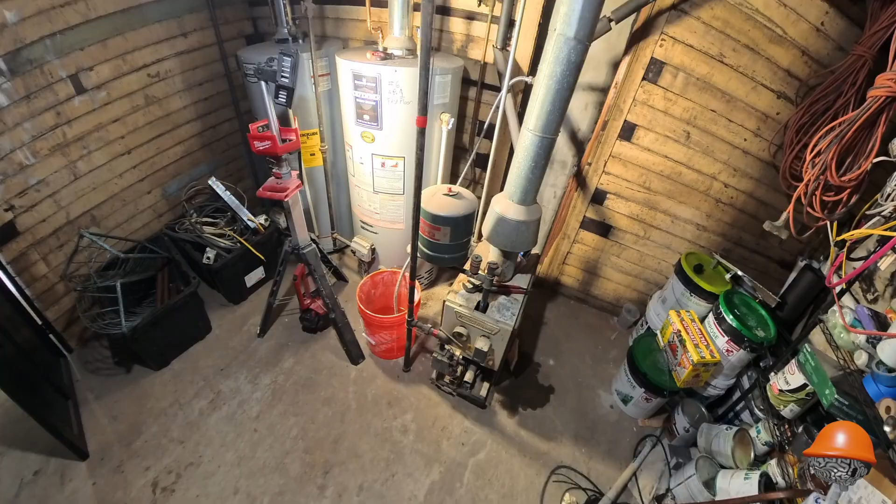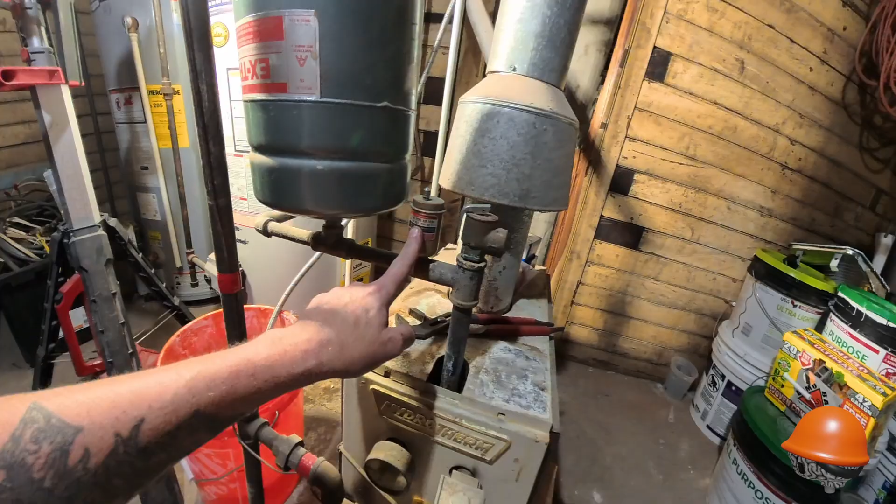So today we're gonna fix things for sure. This is something I did with the 3-bedroom unit that I have over there. Before I rented it to tenants, I went over to the boiler and just visually inspected it. If I saw rust, checked the valves, if anything looked like it was bad, like this, there's rust there. So obviously there's a problem here. This thing was actively leaking on the floor.

So I just unspun the little, there's a copper pipe that sticks out of it. Yeah, it's right here. So I just took that off. I had this system down for 5 months because I was doing work upstairs, and then I went to pressure everything back up, turn the boiler on. Everything works. It just doesn't hold water, which I think is important with these things, pretty sure.

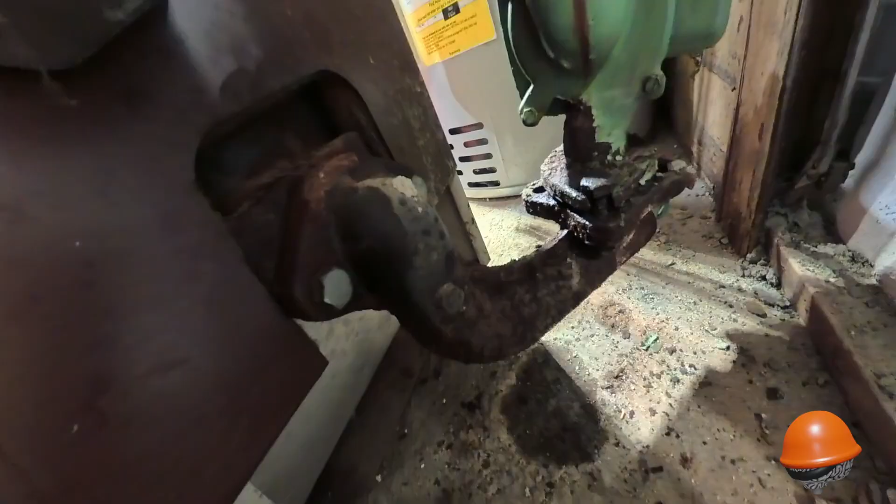And then I came and I was poking around back here. Oh my goodness. Look at that. Oh. Yeah, the pump still works and everything, but yeah, I don't know about that. So I think we're going to do the right thing and spray this with some WD-40 and try to snap these bolts off in the boiler. Yeah, so I think we'll... Oh God, don't tell me, oh, there we go.

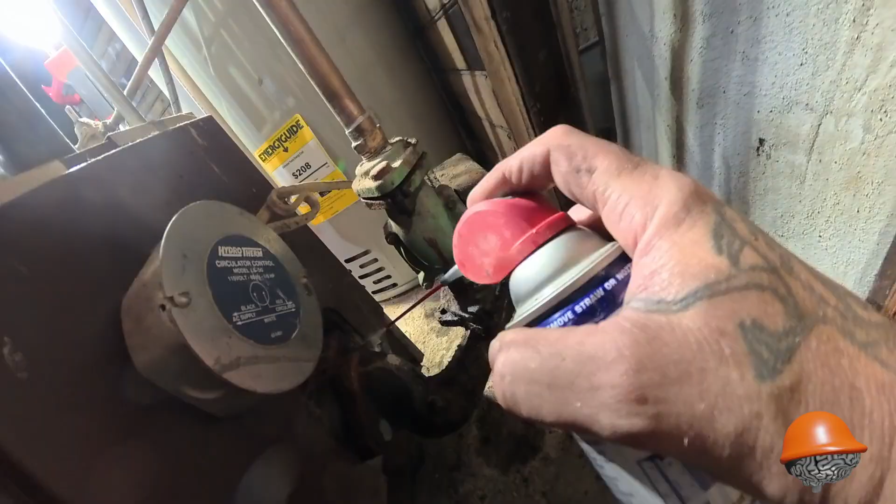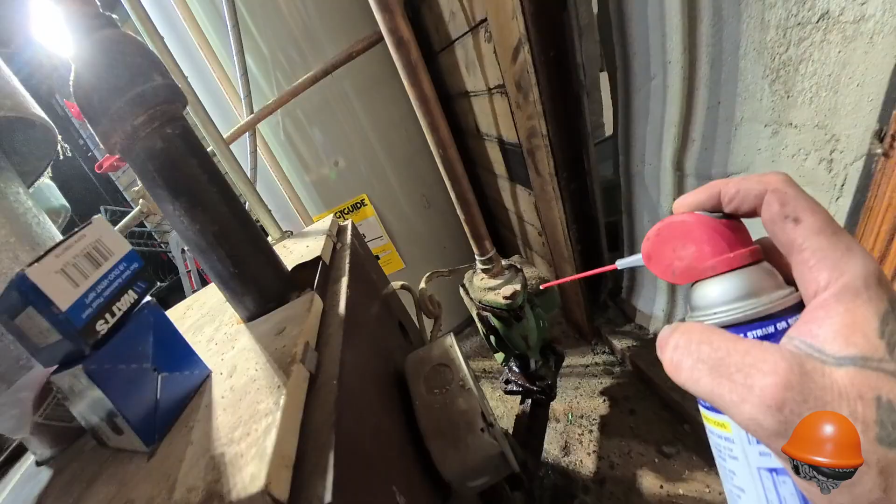Start by giving this a little WD juice. Yeah. That'll smell fantastic once the boiler fires back up.

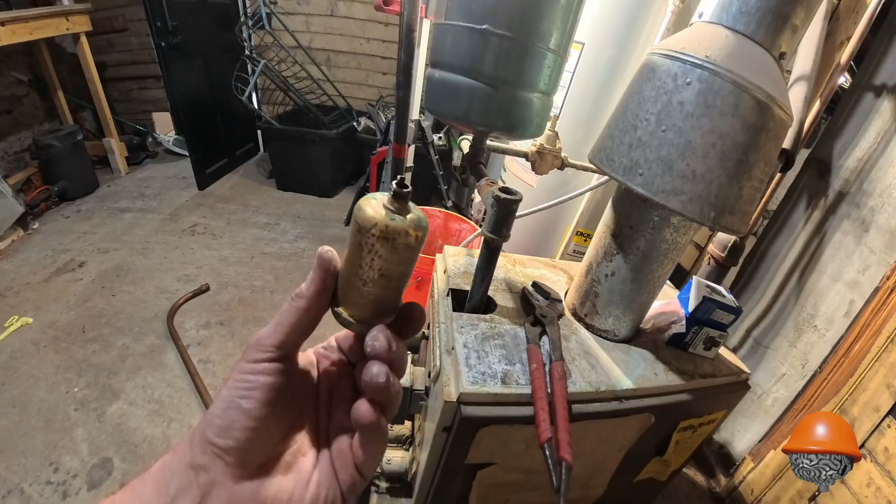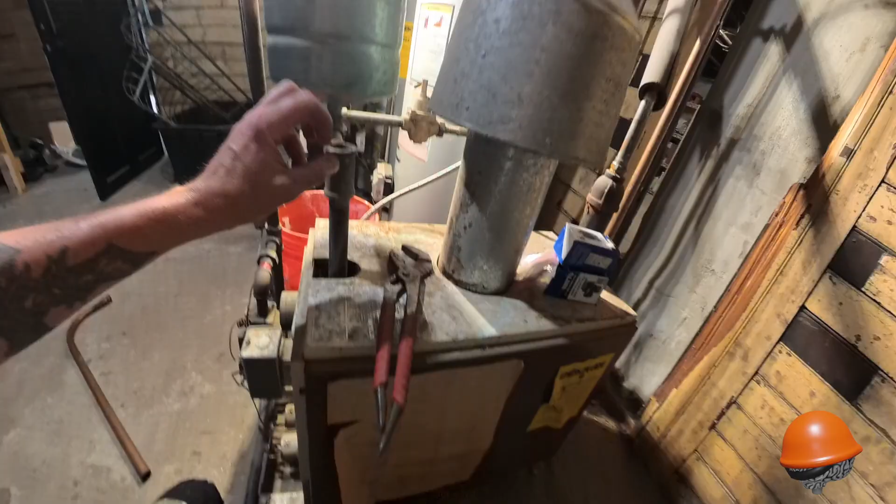So I took out the temperature and pressure relief valve. Opened up that port right there, so all the water from upstairs is letting air in. It's going up through the pipe, and it's letting water down into this bucket. And we're gonna have to just bail that outside. This thing, pretty yucky, man. Yeah, definitely something was happening there. Temperature and pressure relief valve. Yeah, we knew that was doing stuff.

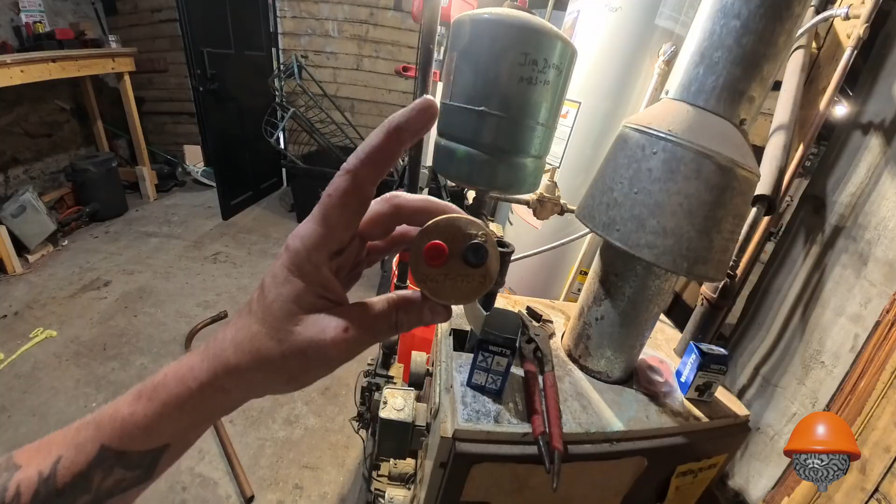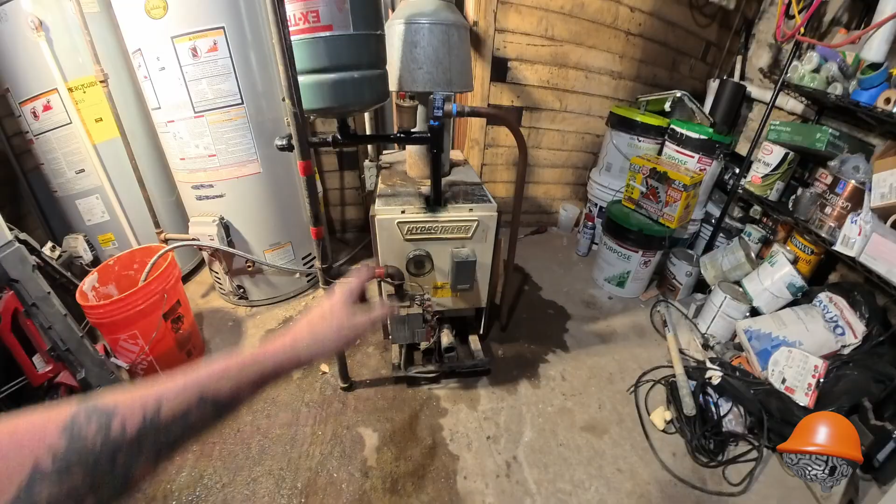It looks better already. We just took some high heat, make it brand new spray, kind of wire brushed it, put in a new air vent, new temperature and pressure valve, our little stick that goes down to within 6 inches of the floor for code. And yeah, it's crazy to me that they use black malleable pipe for water.

But see, here's the thing, right? This water stays in the loop, and you can use that pipe as long as you don't introduce oxygen. So it's the same thing with your boiler. If you fill up your boiler and then drain it out and just let it sit drained out, oxygen gets in there and it will start to deteriorate the inside. So you don't want to do that.

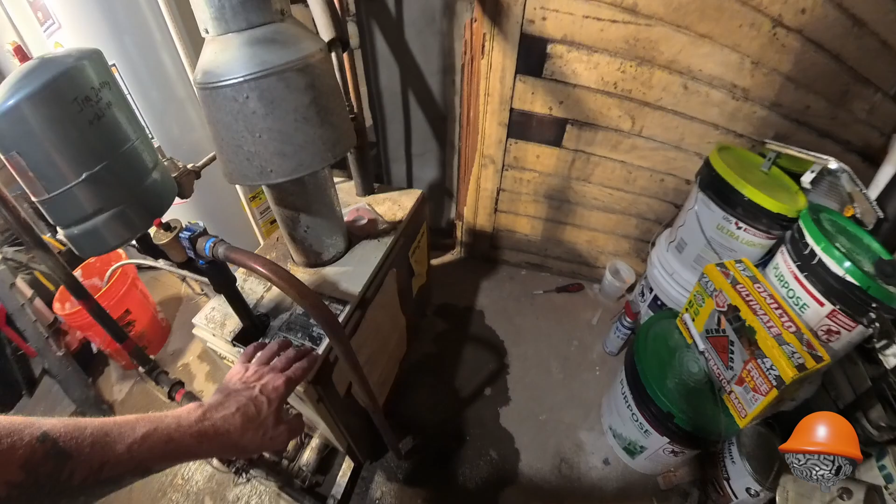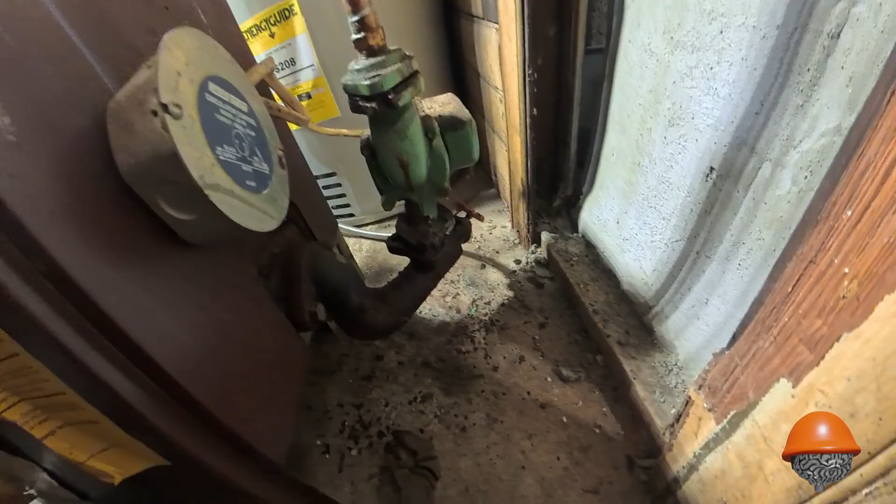I mean, we're probably going to have to do that tonight. We're probably going to have to try to get all the water out of here, pull this apart, and I'll go get some materials tomorrow because I don't know if we have to cut these bolts off. Probably. So this should prove to you, if something doesn't look good on your boiler, I think you should take care of it. Don't just ignore it, because the problem won't go away.

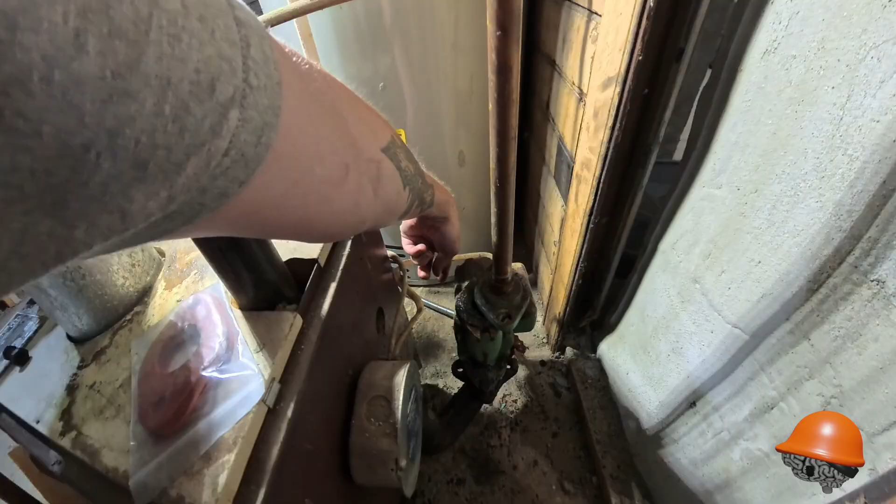So I just went to cut. Yeah, see, I tried to cut this top bolt, but it shook loose before I could get it out. And then this one, I can't get an angle on it. So I went around the backside, and as soon as the Sawzall blade hit the bolt, it just broke. So that bolt was almost completely rusted through. All it took was a small nudge, and it just snapped. So this was like days, weeks away from just going, in the middle of winter.

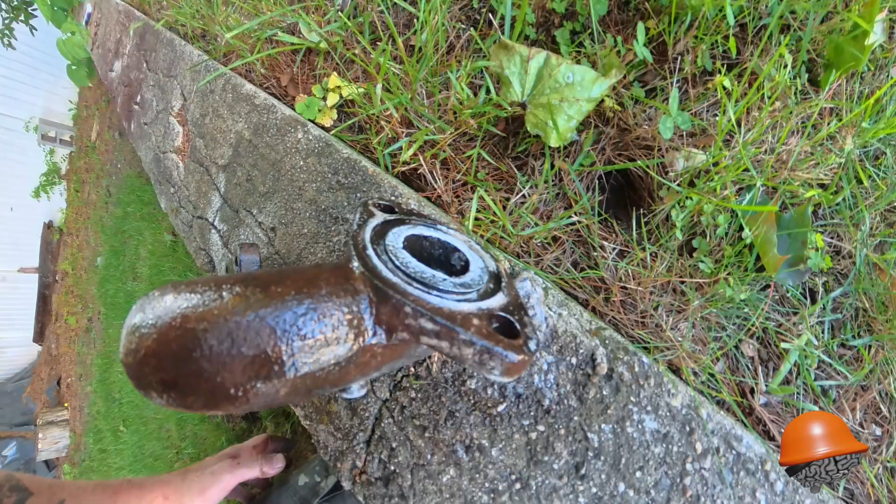Well, leprechauns tell me to burn things, so I burned that. And now we're giving it the rust cutter. Dude, look at that. Look at the rust. It just melts it away. You don't want to get this stuff on your skin, though. It does burn a little bit. Just a little bit. It's not too unbearable, but...

Yeah, this stuff will actually stop the rust in its tracks and makes it perfect for paint. Alright, while we're waiting for the outside thing to kind of dry...

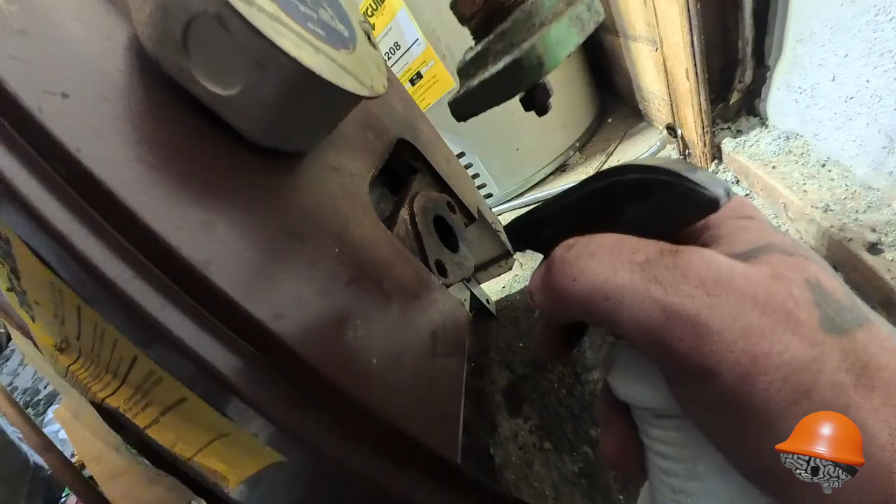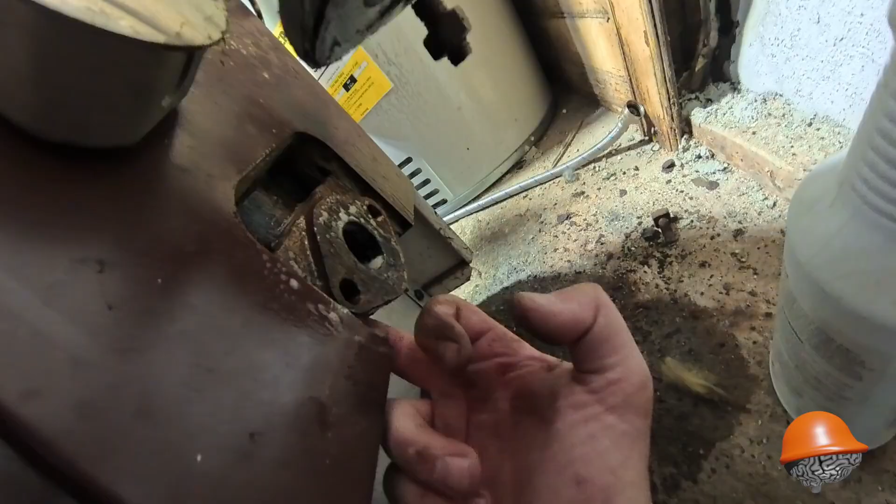I wire brushed the crap out of this after I put some rust cutter on. I made sure to get in the holes, and you can actually get in behind these holes. That's where the nuts... oh God, this stuff. Some powerful stuff.

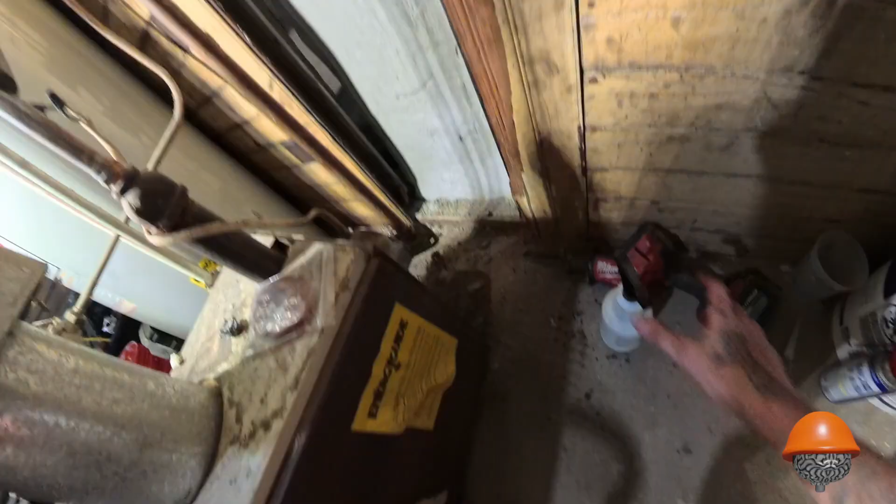But I just want to hose... oh God. Yeah, this stuff works amazing, but it burns your skin a little bit, and you don't want to breathe it in.

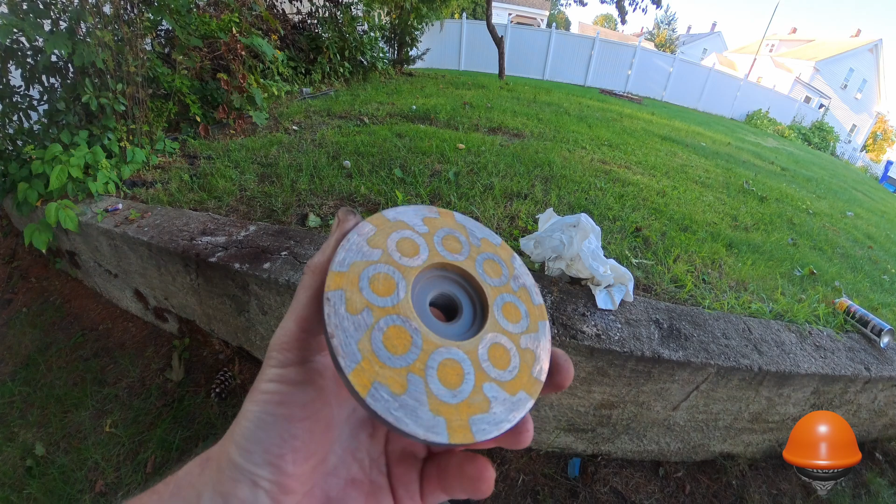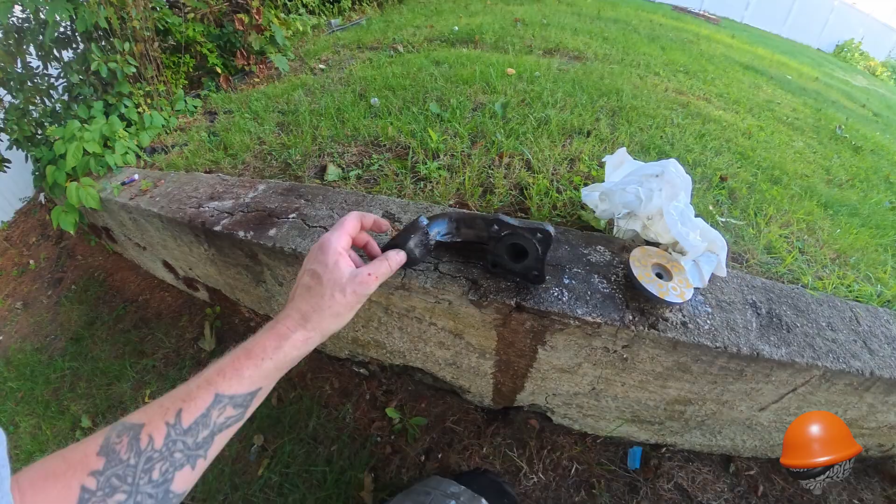So I have this. It's for grinding countertops. It's a diamond bit. It's super flat. It was really expensive. I bought it for a different purpose, but it didn't exactly work for what I wanted it for, so I've just had it. And I'm thinking this is the perfect candidate to kind of just flatten that flange.

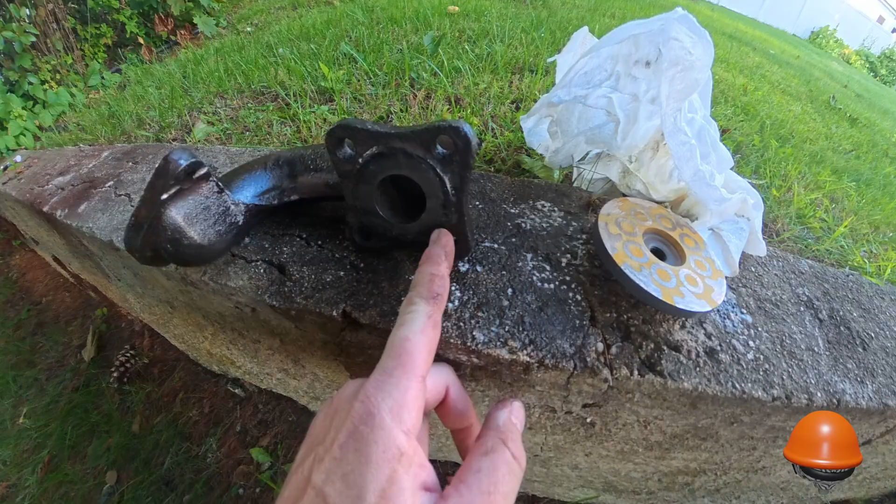And see, this is the thing, right? This side has that opening, so the black gasket sits down inside of that. I'm thinking they used black gaskets the last time, which don't go all the way to the edge. That's why we have this crusty outer layer. It's because the black gasket actually makes a seal on the inner side of this. So I think the best bet is to go with the black gaskets and not the red ones.

But I'm still going to very carefully get some of these high points flat, dry this off, maybe heat it up so that it dries quicker, and then we're gonna give it a paint job. Oh my God, I didn't think that was ever gonna look new with the rust buildup. It flowers, it grows like weeds, and you gotta knock them off. I think once that dries, that's going to look pretty dang good.

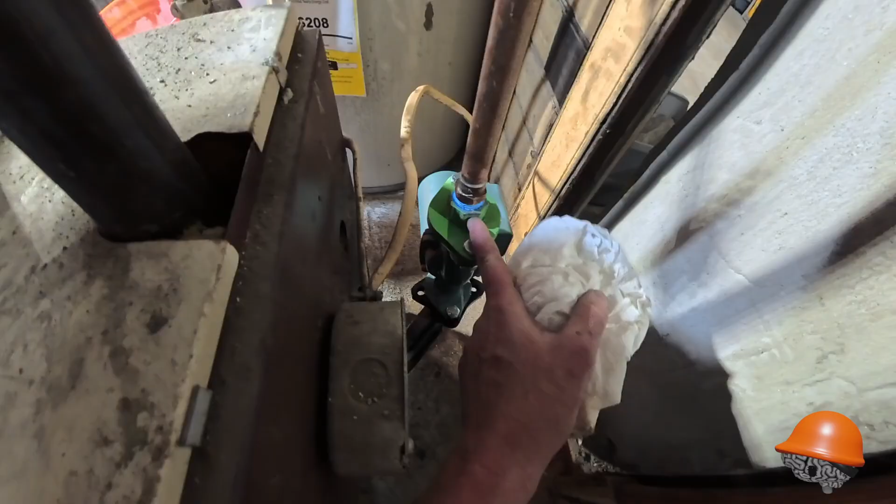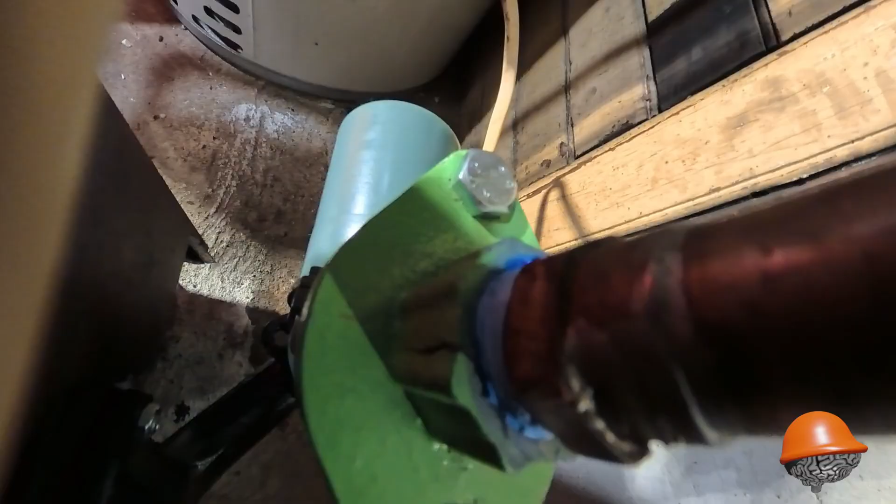Alright, well, I was tightening this flange on, and it was hard. And then all of a sudden it got really, really easy. And I should have known what that means. Can you see it? Yeah, it's split. Taco flange, split.

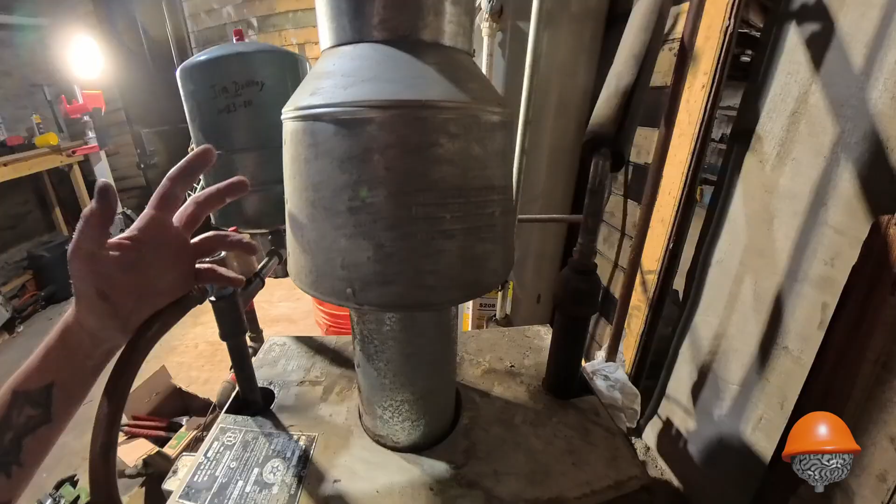So at least we have some water in the boiler now. We're holding water up to here. I'm going to go grab another Taco flange and a new expansion tank. And then hopefully this thing will work and nothing else blows up.

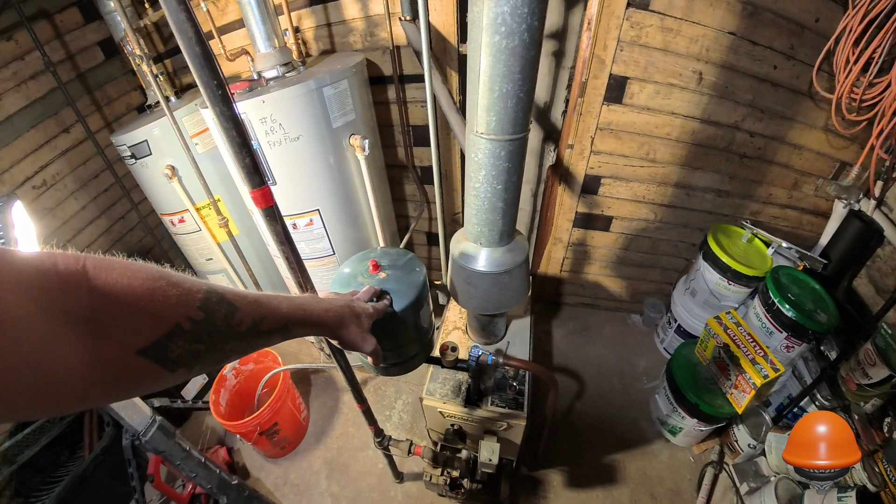All right, so we're gonna start off. I did go to Depot and saw that they had expansion tanks. They were like $30 each, and I was like, yeah, we should grab it. But then I saw the quality of it and I was like, nope. So I wanted to see what this was, seeing that it's been here since 1980.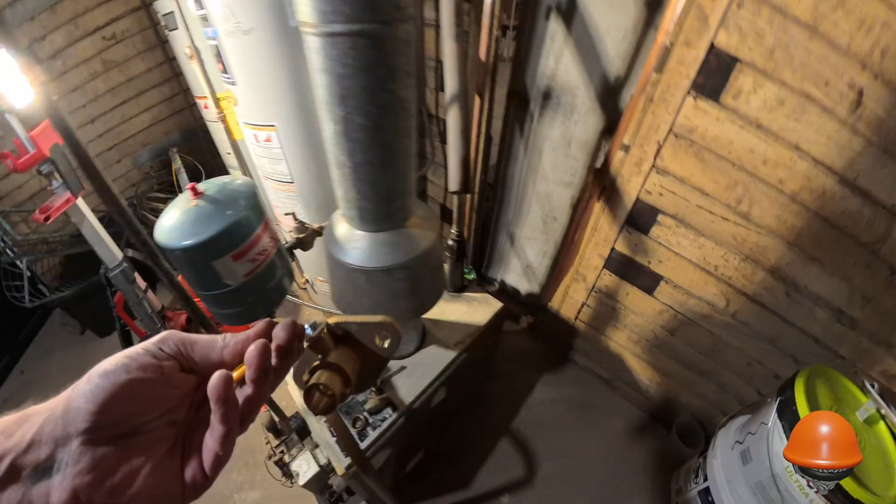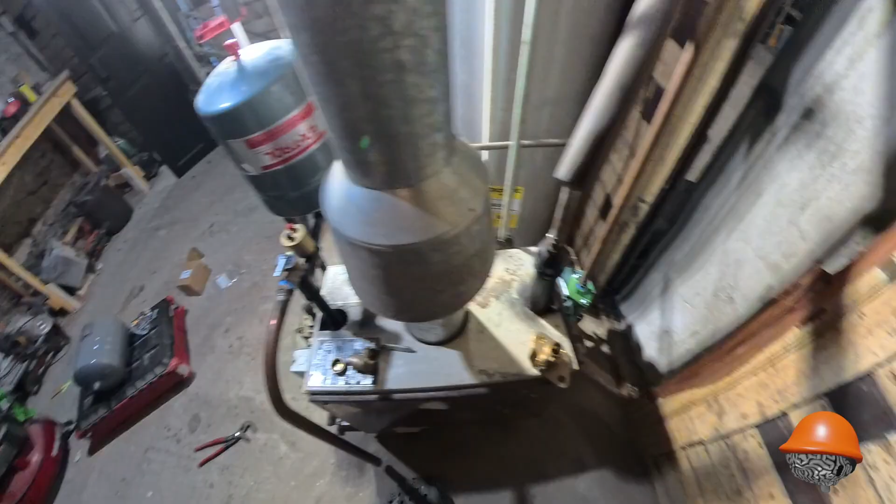This is an Amtrol Model 15. So I looked online and son of a gun, there's the Amtrol Model 15. It was $60, twice the price of the Home Depot one, but I think that was a wise decision. Let's pop that in. And then, look at this. No more threads. No more stuff to snap and crack on me. That's getting soldered on, and it's solid bronze. All right, let's get rid of this.

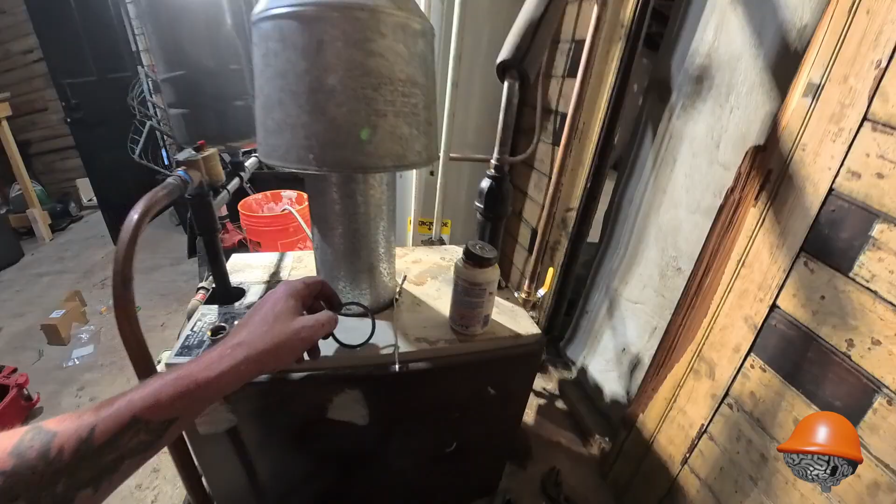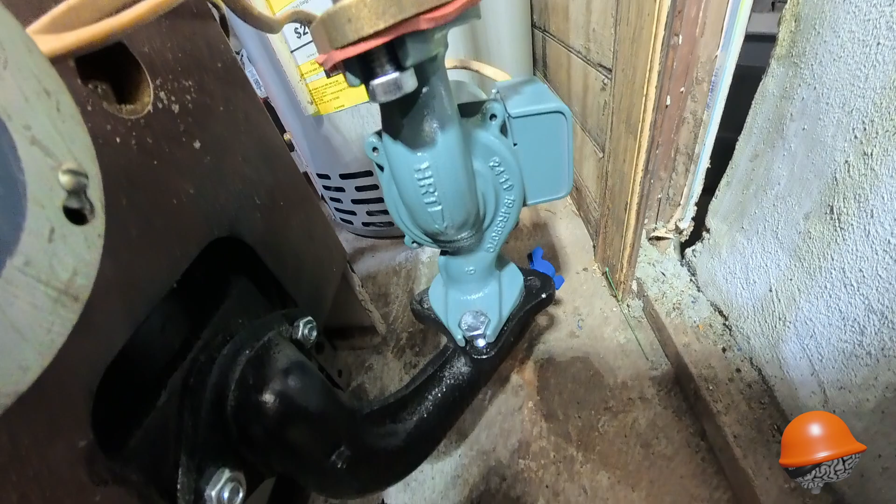All right, I got it cleaned, fluxed. I dropped the bolts in loosely to make sure we're lined up correctly. Put the handle in the back where you can get to it. There's no gasket in there. I'm gonna solder it up now, let it cool down, and then slip the gasket in and tighten it up. Yeah, look at that. That looks brand spanking new.

All right, guys, this is why you should always trust who you're hiring. No matter if it's mechanic work, boiler work, housework, always trust who you're hiring. Because I find it's a common theme that people just tell you, sorry, you need to replace it. And they take advantage of people, and it's sickening to me.

So I had a heating company tell me I needed a new boiler. It's unsavable, you need a new boiler. Then I went to a couple of supply houses to find parts, and they also told me I need a new boiler. And I was kind of sick to my stomach. I'm like, you guys are fucking scumbags. You know what I mean?

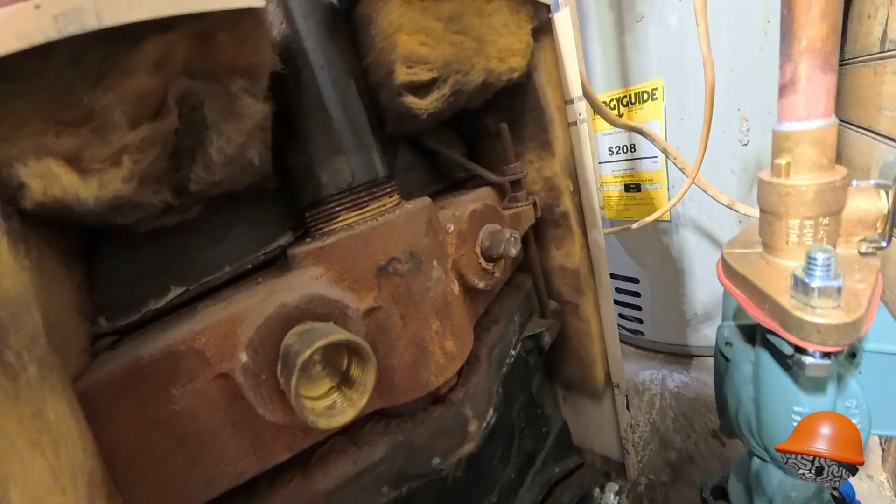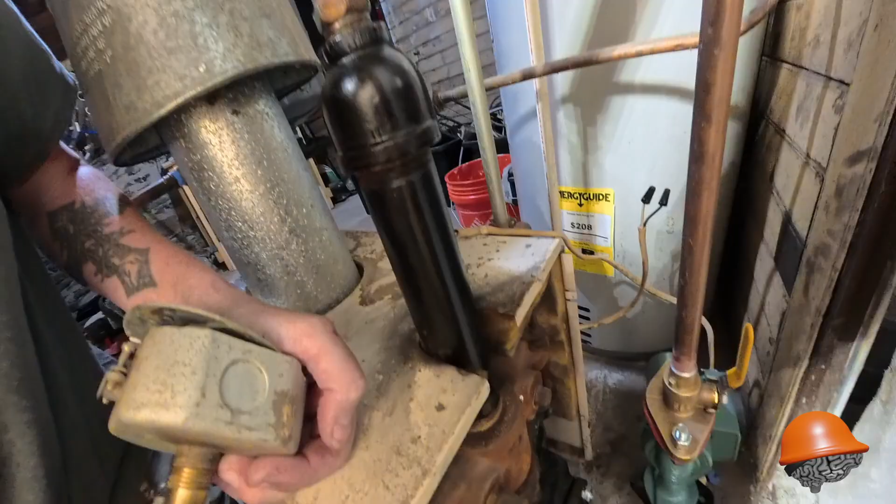Because I took the jacket off my boiler. The actual boiler itself is in excellent condition. I mean, there's no rust. I mean, this thing looks beautiful. All right, the jacket looks a little rough, but the jacket is just to cover in a little bit of insulation to cover the boiler.

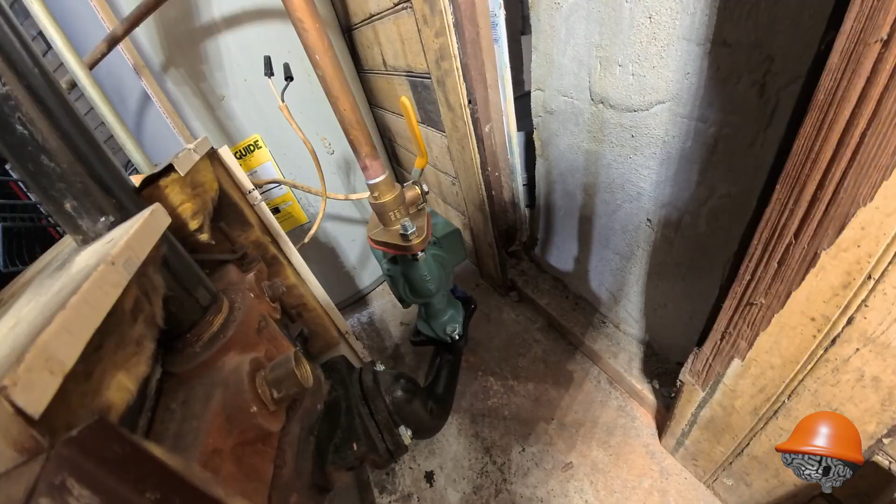So I got everything running. We're full of water, and it works. If I turn on the thermostat, the system fires up, and it runs, and it heats. The problem I ran into is this new Taco pump that we put in. It does not shut off. It just keeps running and running and running.

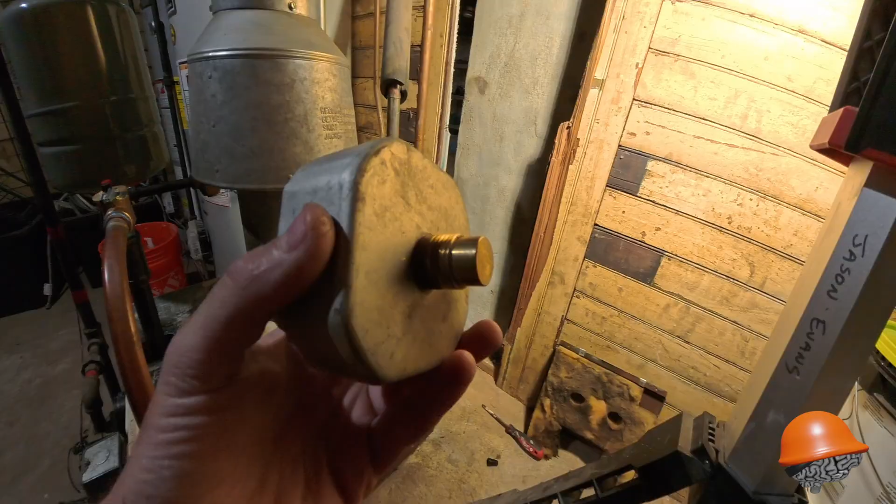So I did a little digging, and I found this. You see that little brass thing? That threaded in there. And then there's some wires coming out of it. But this is full of water, and I've already bled everything out, I don't want to take those out, necessarily.

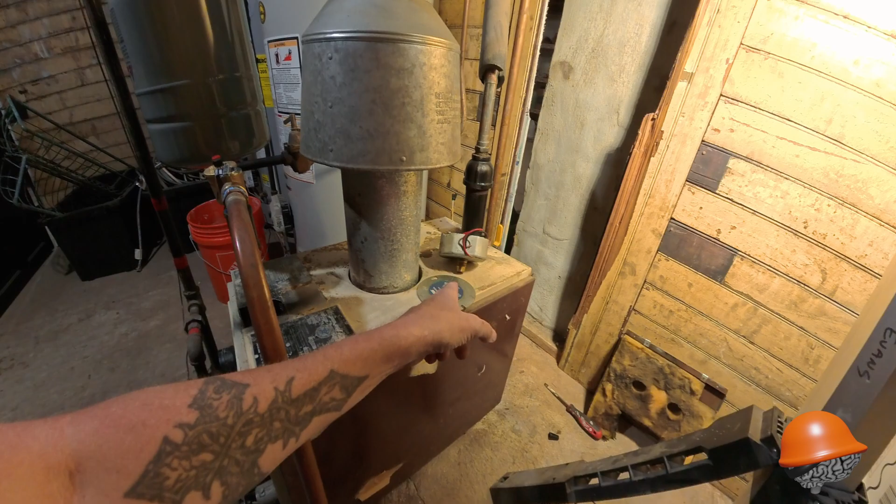And what does this say? Oh, this is a Hydrotherm circulator control. So this is an electrical control. Model LS50. Problem is, this part doesn't exist. They stopped making this part a long time ago. Right, so I went looking for this or a substitute.

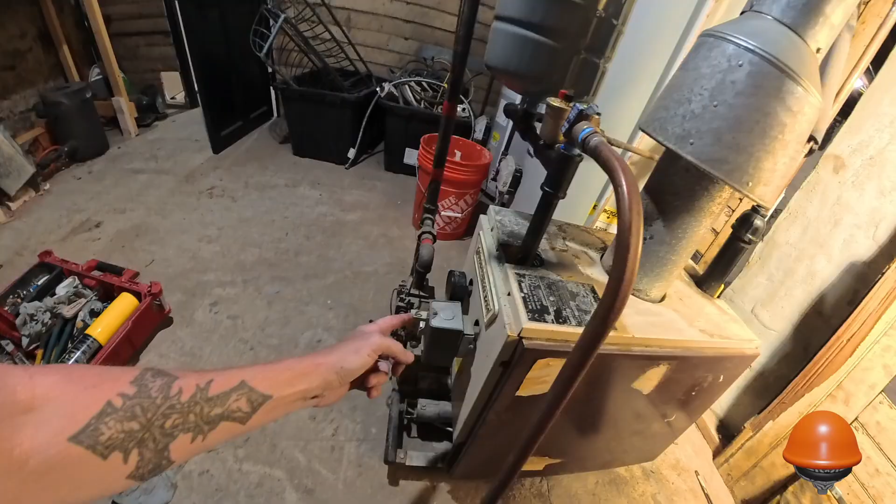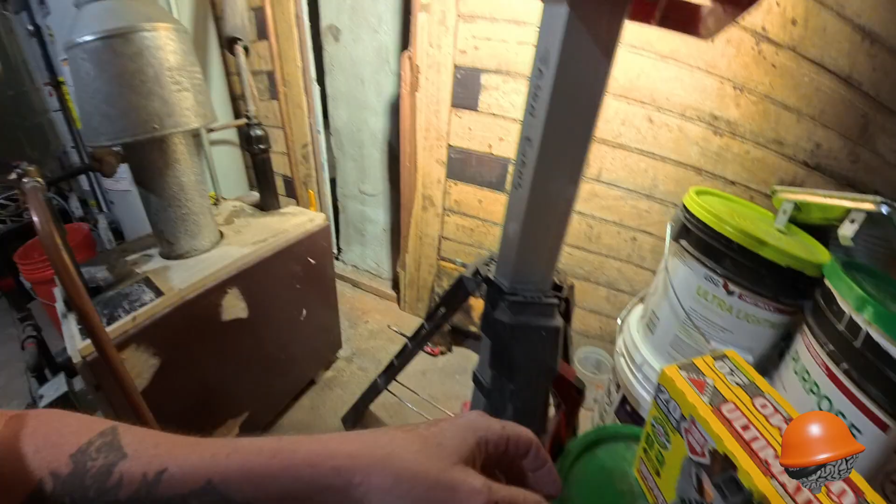I even asked AI. AI told me to get one of these, a Honeywell. Basically, this sort of does the same thing as this. This uses a little probe, and it senses the temperature of the boiler. Once the temperature is hot enough, this will make a connection and send power to the pump. But when it cools down, it's supposed to shut off, but it doesn't. So that switch is broken.

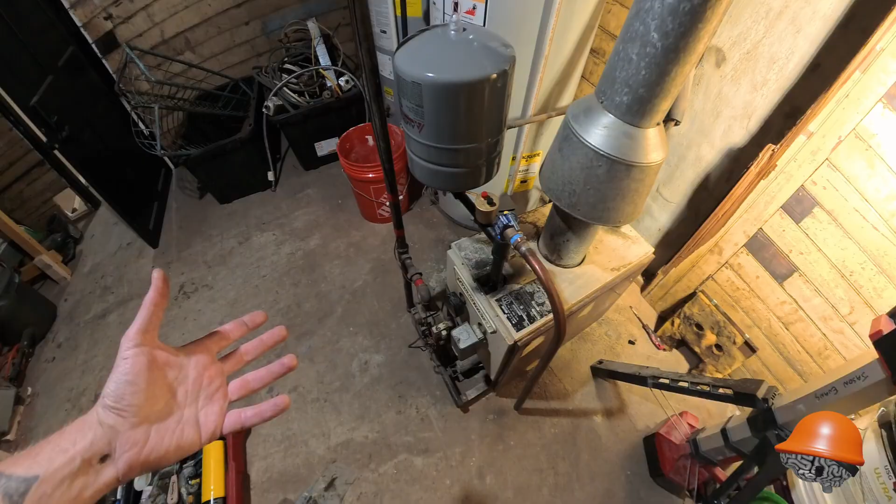So they're telling me I need a new boiler because of an electrical problem. Does that make any sense to you? No. And basically, I did not like the idea of these because I don't know if it's normally open, normally closed. I'm not sure.

This basically senses the temperature of the boiler. Once the boiler gets up to like 180 degrees, this will tell the gas valve to shut down. And the circulator pump will continue to circulate the water as it cools down. If it gets cool enough and you still want heat, this will tell this, hey, fire back up, and it will kick back on. It's pretty simple.

Right? But the whole thing in the back, and I figured the best way to show you guys, I mean, these old systems, they're so simple, it's crazy. But sometimes that's what you have to do. You have to take a step back and boil things down literally to the simplest form. So here we go. Here's the setup we have currently. I drew a nice little diagram here.

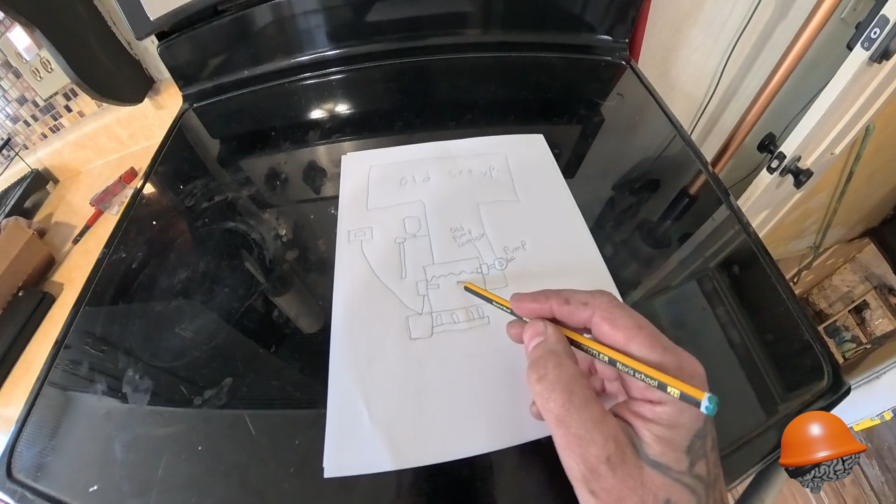So what is a boiler? It is a cast iron case or container that has water in it. And then we have a gas valve right here. And this heat tube, the flames come up and hit the bottom of the boiler, heating up the water. And when you're in your house and you go, hey, I'm cold, I'd like some heat, you turn on your thermostat, and the thermostat sends a signal down here to the gas valve.

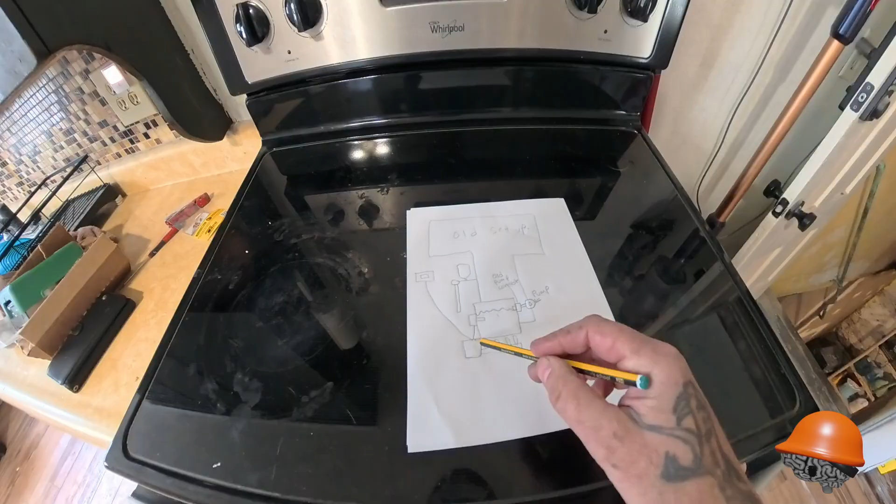And I'm leaving parts out. Yes, there's a thermopile here that's on the pilot that takes heat, converts it to low voltage electricity that goes up this wire. And then when you call for heat, it makes a connection and then it comes back. Yeah, I'm leaving out some stuff. I'm just trying to get the very, very basics here.

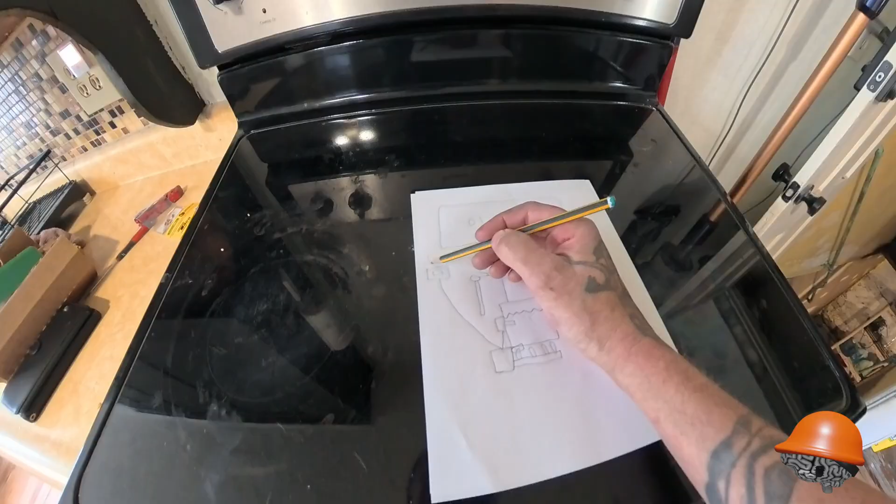So we have the aquastat here in the front, senses the temperature of the water and tells the gas valve to turn on and off accordingly. And if you say, I don't want heat anymore, then it just all shuts down. But if you still want heat and the water gets too hot, the aquastat in the front regulates and tells the flame when to come on and off. Pretty simple, right?

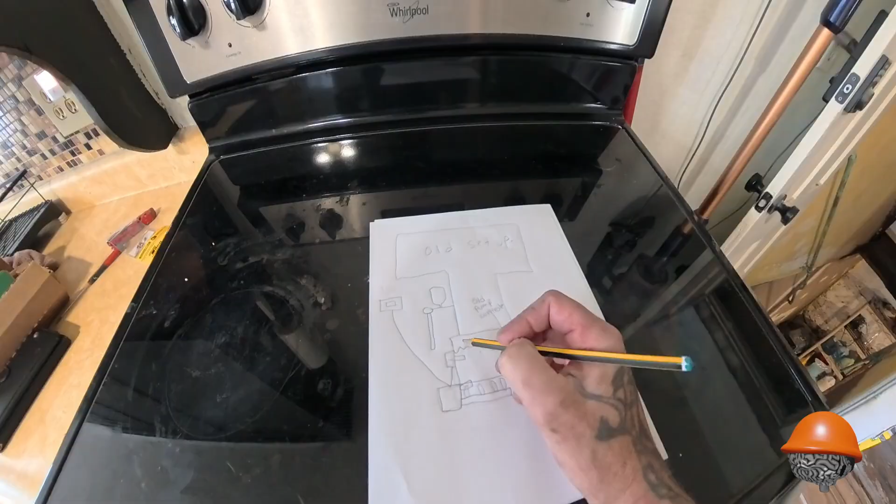Then we have a pipe coming out of the top. That water gets pushed. And we have an expansion tank because when this water heats up, it expands and it needs somewhere to go. So it goes into this expansion tank, which has a diaphragm. There's water on the bottom, air on the top. And then a safety valve, temperature and pressure relief valve.

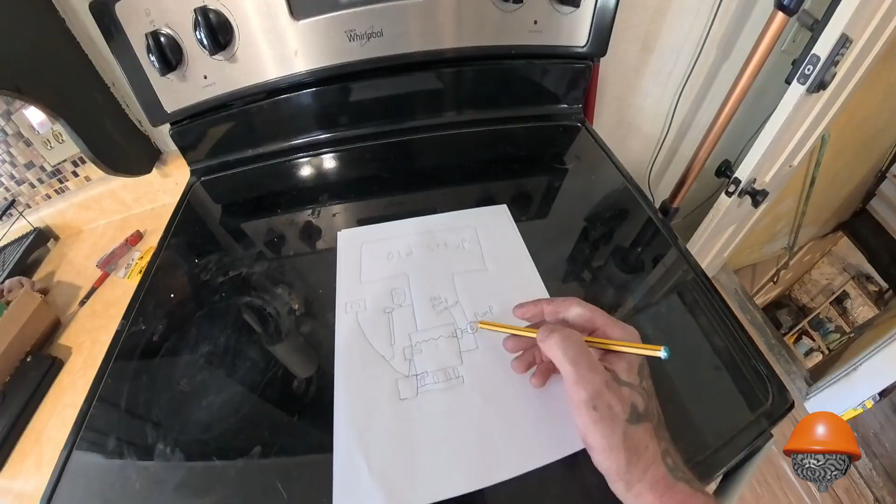If this tank failed and it was full of water and the pressure was building up beyond its limits, it would shoot the water onto the floor so it didn't explode. Got that? All right. Now the water gets pushed through your whole house and then comes back down, and this circulator pump pulls that water down and pushes it back into the boiler and then back up,

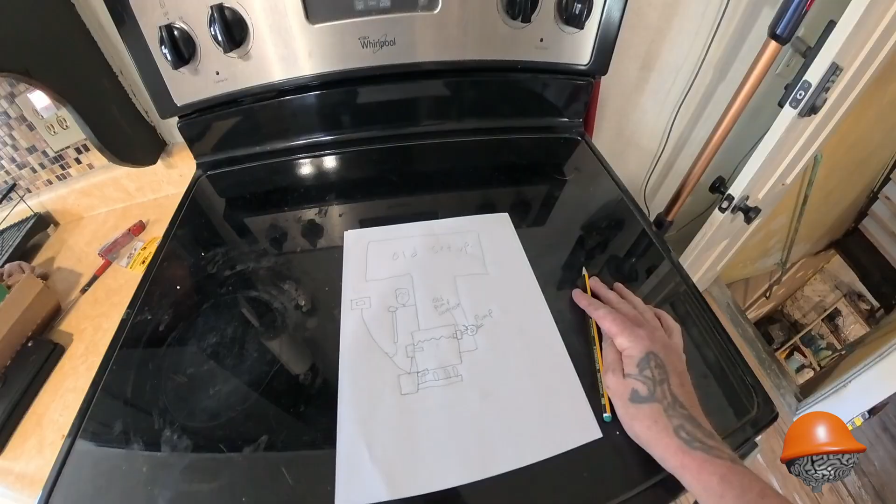and it's just a continuous loop. And the way the old system worked is we had a control module here on the back that sensed the temperature of the water and told the pump to turn on. You got it? I mean, it's pretty simple. And yet, every person I was talking to told me that I needed a new boiler.

Right. I had 4 guys at a supply house, baffled. They were just sitting there like, we don't know what to tell you. I'm like, come on, guys, you don't have a boiler expert? There's got to be somebody here that knows some sort of control. I said, all I'm trying to do is control the Taco pump. I need something that will tell it when to turn on and when to turn off.

I mean, come on. They couldn't, I was like, forget it. I'm just going to go look in your aisles. So I started walking through their aisles back and forth, opening boxes, and guess what I found? Made by the same company that makes the Taco pump. This is a switching relay for one zone. That's what we have, one zone.

And basically, I asked AI, and I looked on the online forums, and what the online forums were telling me to do was to put another one of these aquastats in the back, and then have the aquastat control the pump, which may or may not have worked, depending on if it was normally open. There's switches that are normally closed and normally open. And then depending on the control, it'll either close it or open it. That's very important to know, and they couldn't tell me.

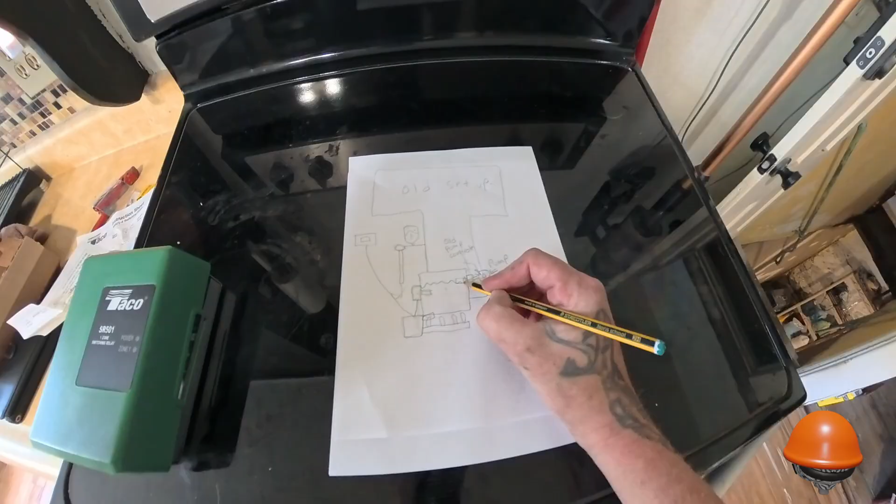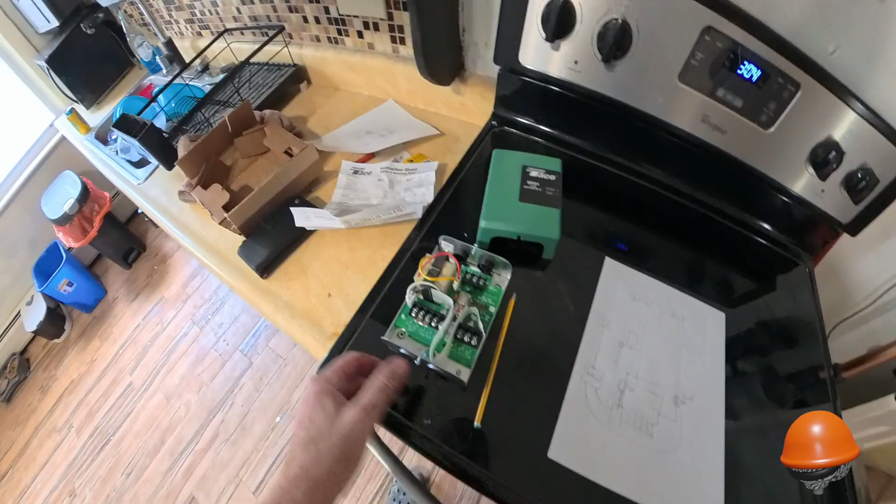And plus, to get the new brass probe to go into the boiler, plus the control, it was going to be $200. $200 for those two controls that I had no idea if they were actually going to work. But then we found this. So this is how, in theory, I'm thinking. I'm still going to have to figure out controls a little bit, or wiring, which is basically just plumbing in wire form. But this is how it should work now.

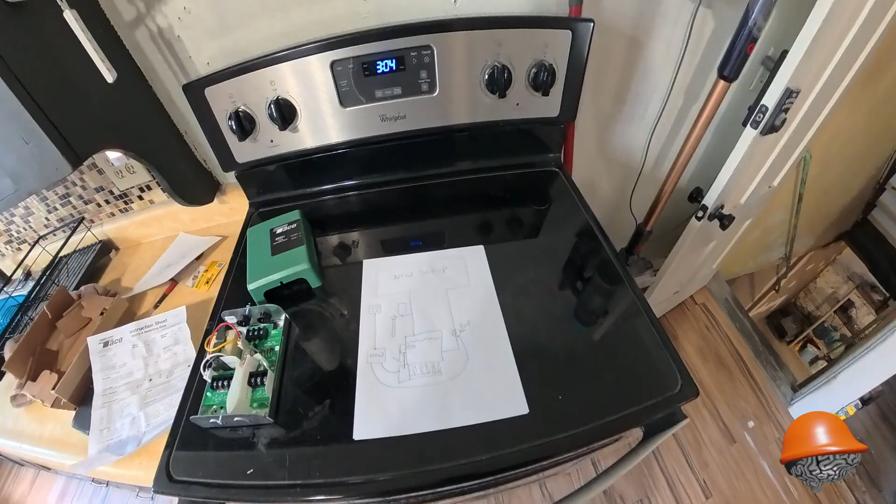Here's our new setup. So instead of the thermostat coming directly down to the gas valve, the thermostat's going to go into our new controller box. And then from the controller box, it will go out to the gas valve. So this control box will control not only the boiler turning on and off, but it will also control the pump. So this will be the main control module now.

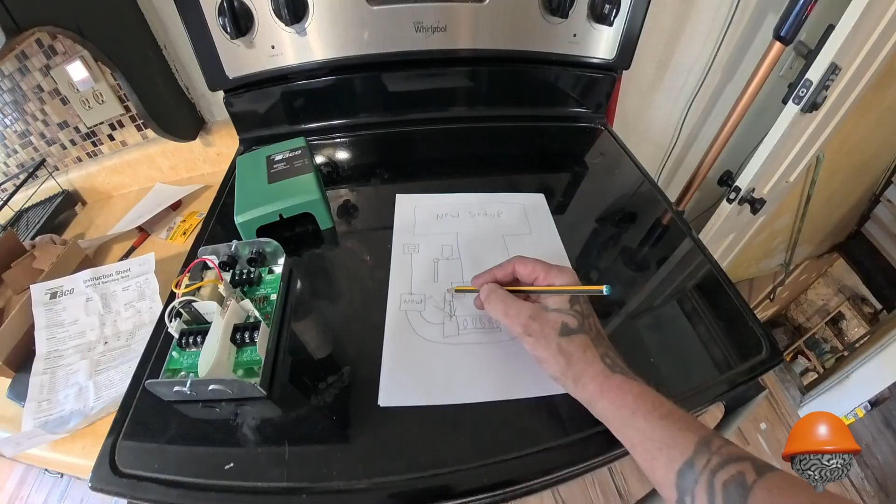That should control everything. We do not need to disturb the link between the aquastat and the gas valve. The link between those two can be left as is. That link does not need to be controlled by that box. All we have to do is just take the thermostat wire off the gas valve, put it into this, and then bring power in, bring power out to the pump. And this was $80.

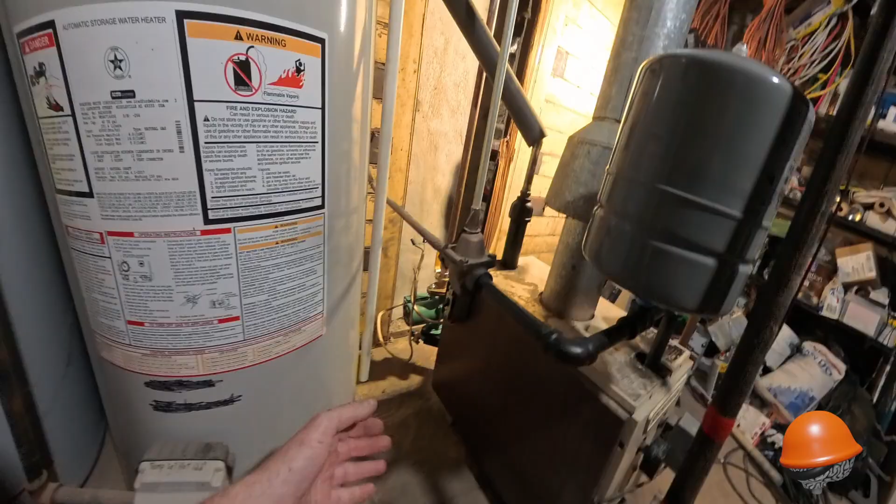All right, so while we're here, I want to double check the electrics. All of them. Because usually when you see a switch on the side of a boiler like this, that means you can turn everything off for service, correct? Say we were going to change that part in the back, we want to be able to turn the power off so that we can service this and not disturb anything else. I went and flipped this off, pulled this wire out of the old control, and sparks flew.

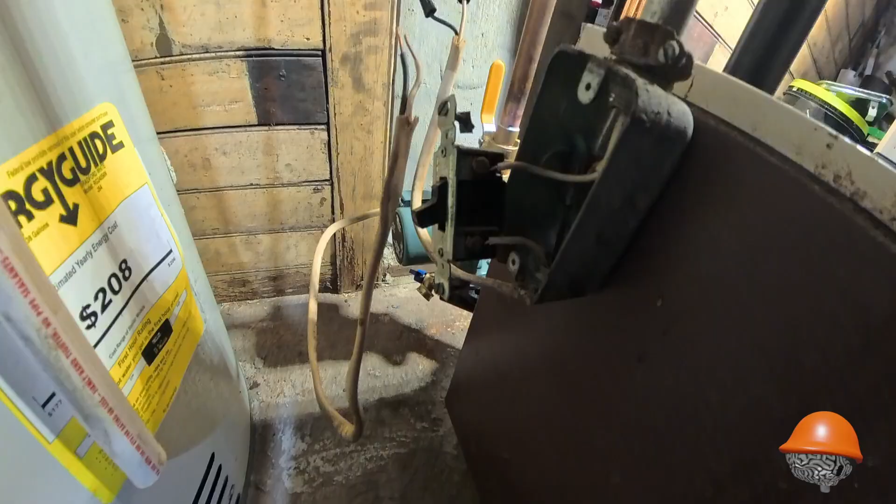Well, I would say this is unbelievable, but I have found worse things in this house. They put the common wire to the switch, not the hot wire. I mean, God forbid. So that would make perfect sense why when I tried to pull that out of the box, sparks were flying.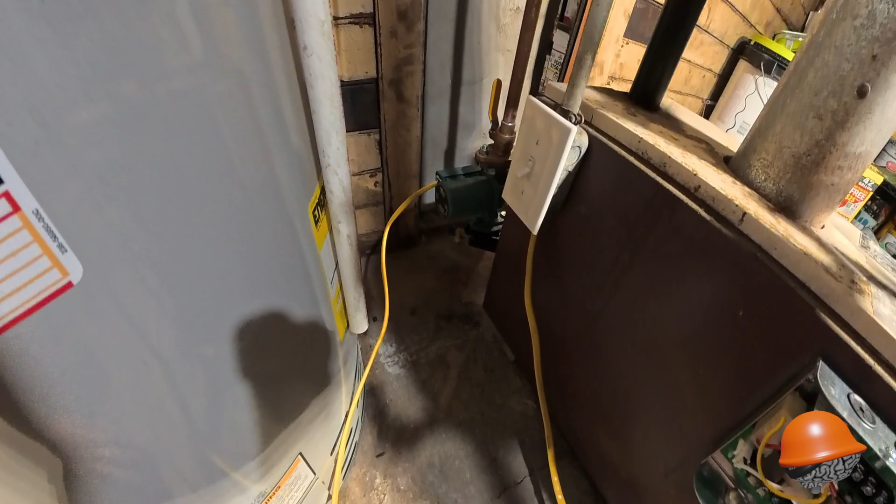So we're going to replace this switch because it feels old and clunky. We're also going to replace this with a longer piece of wire, and we're going to hook the new switch up properly. All right, so we got our switch in correctly this time. I had to shut the circuit off. It goes to that light because this is where that's pulled from.

New switch. I put a plastic plate. I mean, it's all I had. Maybe I'll get a metal one at some point. And then I put a new wire coming from the electrical box. So now when this switch is off, everything's dead. Everything. Including the wire coming out of the box, like it should be.

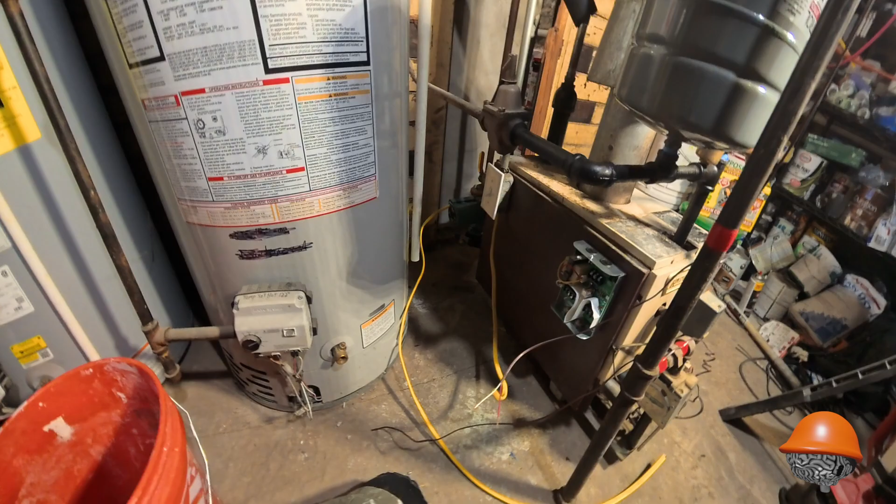And then I put a new wire coming from our Taco pump, because it was too short. And here's our thermostat wire coming down from upstairs, which is brand new. Just ran this. And we mounted our box to the side of the boiler here. Couple of screws through the jacket. Won't affect the boiler at all.

And then I've added a new thermostat wire with a little coil just for some extra slack, you never know. Reconnected to the gas valve, taped on. And this will come in the bottom. And then these two wires will go into there.

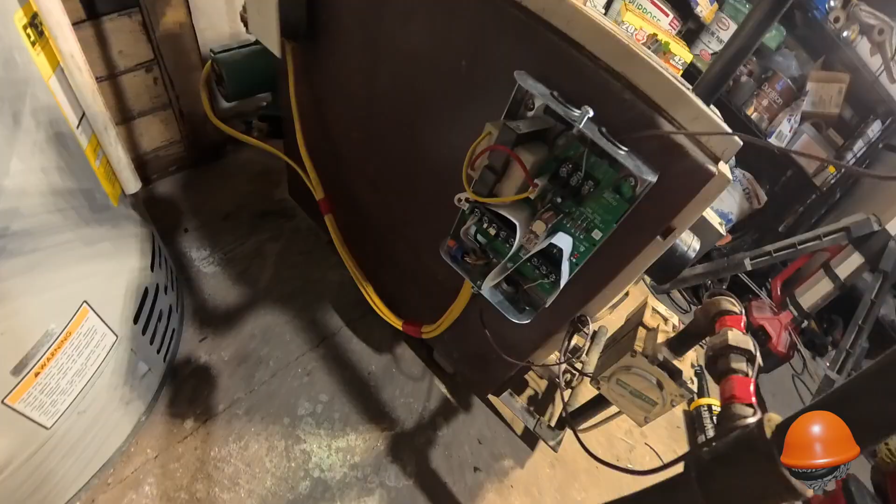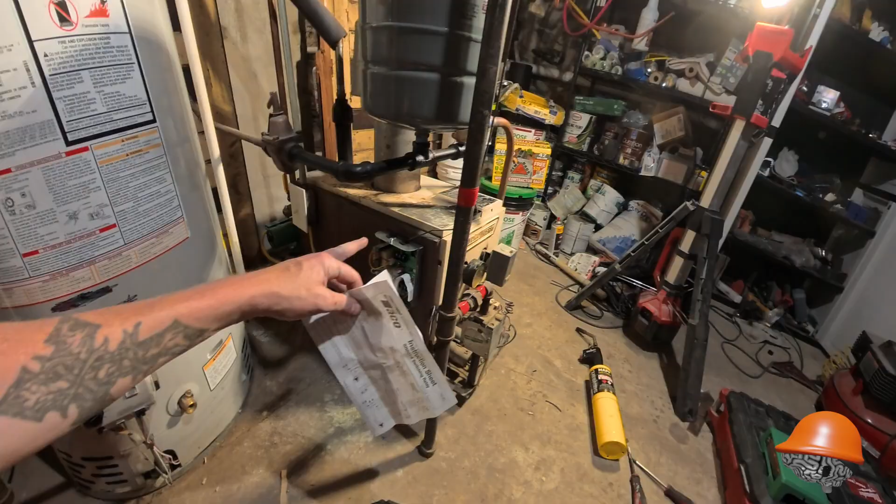Alright, so this is just for anybody who's interested or may have the same problem I had with a Hydrotherm boiler. It's so old you can't get parts for it. So I got a Taco one zone control box, and I went with typical wiring, the very first one. Then there's alternative wiring, and there's a bunch more on the back. But just to go over this before we test it and see if it works,

the Aquastat is still wired directly to the gas valve. These two are married, and that stays like that. You don't need to mess with that. The only thing you mess with is you just take the thermostat wire off the gas valve and put it in here instead. And it's super simple. You have red, white, RW, or TT. Right at the top. Thermostat wire in, low voltage side here, common, white.

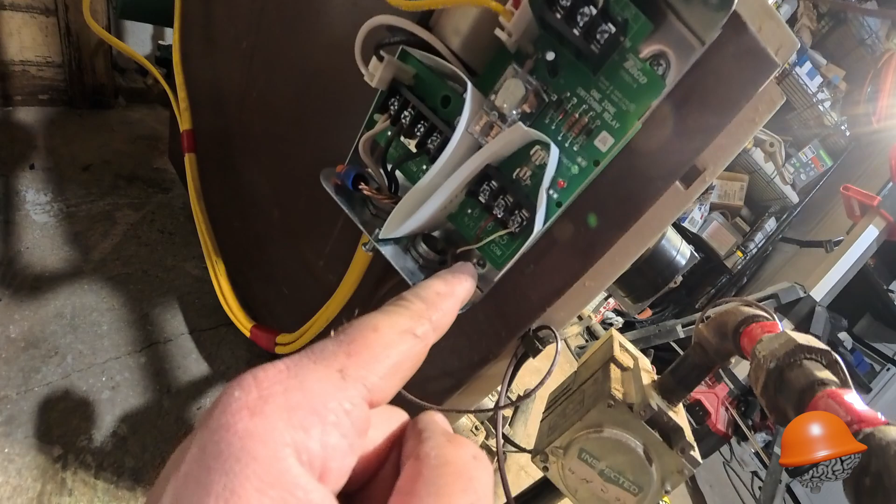And then NO is normally open. And you can also go normally closed if you'd like, for different scenarios. I like how they have that option. But for our scenario, we need normally open. So the red goes to the normally open side. And then from our switch, we have power coming in. We got all the grounds twisted to ground.

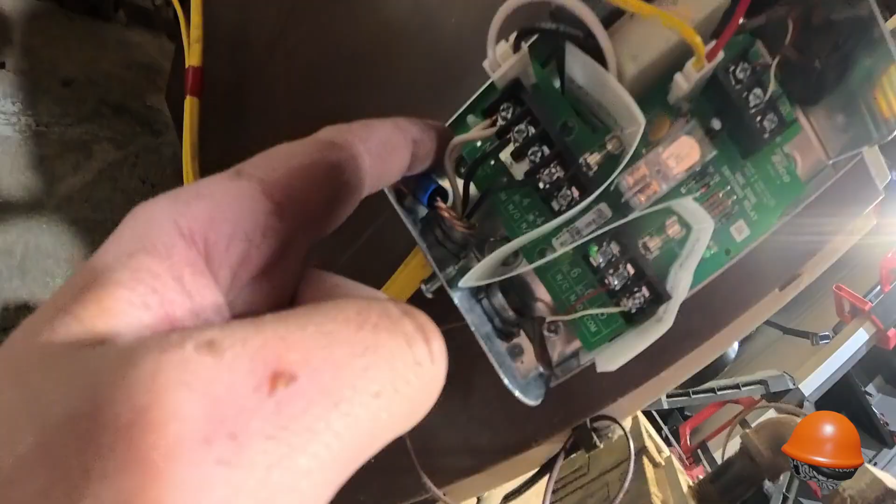Power coming in goes to H, hot. And then obviously N, neutral, right? And then the power basically coming from the pump or going to the pump, we have that wire coming in, and we have both the neutrals in the same. And then we have the black wire from the pump going to, again, number 4, normally open.

We want it open, which means circuit broken. Closed means circuit connected. We don't want circuit connected, we want circuit disconnected until we tell it. And that is the purpose of this control box. All right, here's the big test. Thermostat is calling for heat. It's on, and I have it set to 90 degrees. Let's pray there's no smoke.

And it fired up. But is the pump running? Are we getting heat upstairs? Let's go check. So while we wait a second to see if this is actually working, I was actually just

at a job where a guy had an old heating system that he loved, right? It was vented into his chimney, and it did a great job. He has an old house in the city. His boiler went down. They told him he needed a new one. They came out and replaced it. And then they said, oh, we cannot vent into your chimney anymore. It's not to code. You know what I mean?

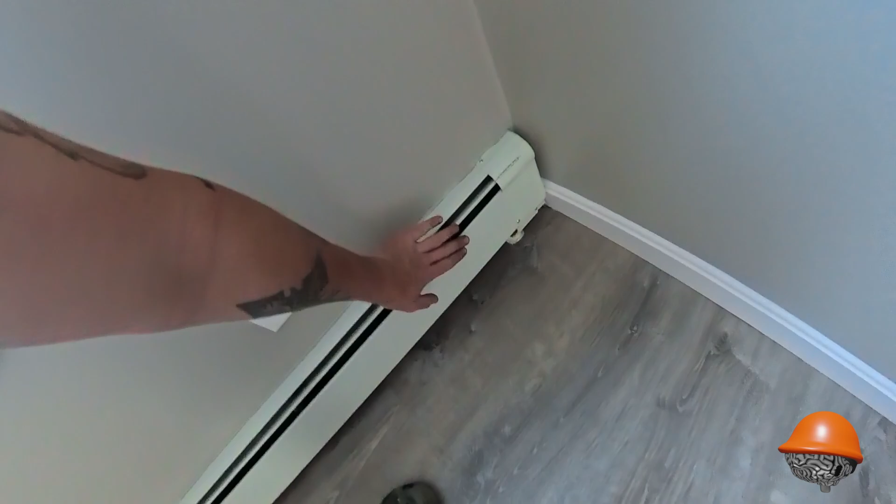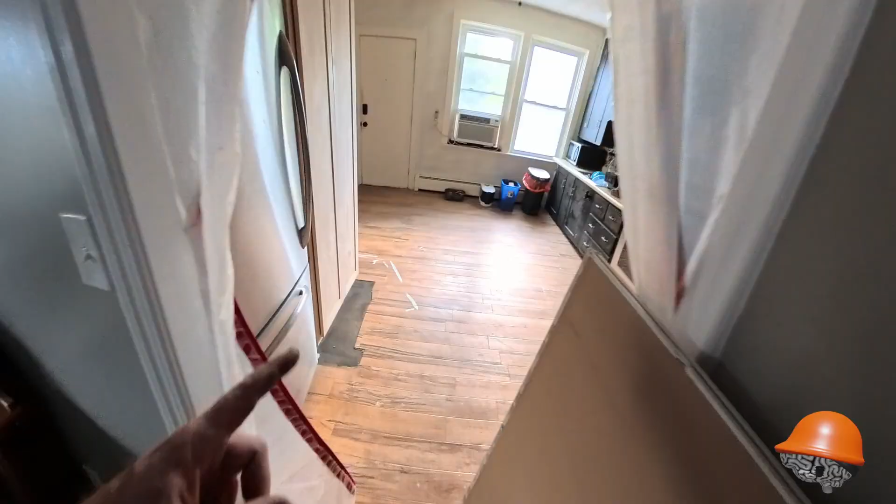Oh yeah, we got heat. I mean, I can smell it again too. I can smell the oil. So now, here's the important part. Whether we get to temperature, which I don't want to get to 90 degrees, or we shut the thermostat off, that boiler and the pump, they should shut off.

Let's see. Did we pull it off? Boiler's off. Pump is not running. Son of a gun. All right, we're good to go.

I turned the pilot back off and flipped the power back off. I like to keep things off completely, until I need it. I don't want that pilot running all summer. It throws off a lot of heat in the basement. Plus, you're just sitting there wasting gas anyway. So I always try to shut the pilot off, flip it off, leave it off for the summertime.

But I looked it up, so for me to replace this boiler right now, had I followed their instructions, it would have cost me $3,000 minimum just for the boiler. Just for the boiler. Plus, I would have had to spend on a Taco pump and all of these valves, tank, rework the vent, a bunch of pipe, a bunch of fittings. So it probably would have cost me in the neighborhood of $4,000 to $5,000 just in materials had I installed it myself. Had I had someone else install it, it probably would be like $7,000, $8,000 to have this done.

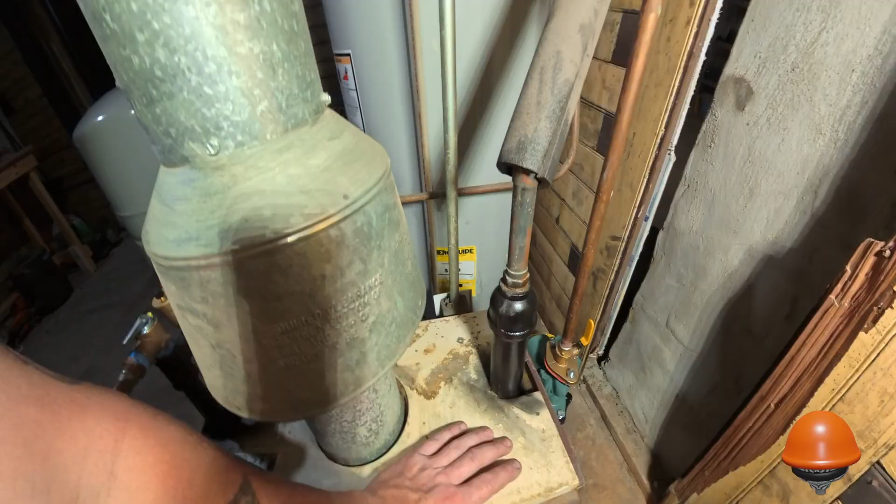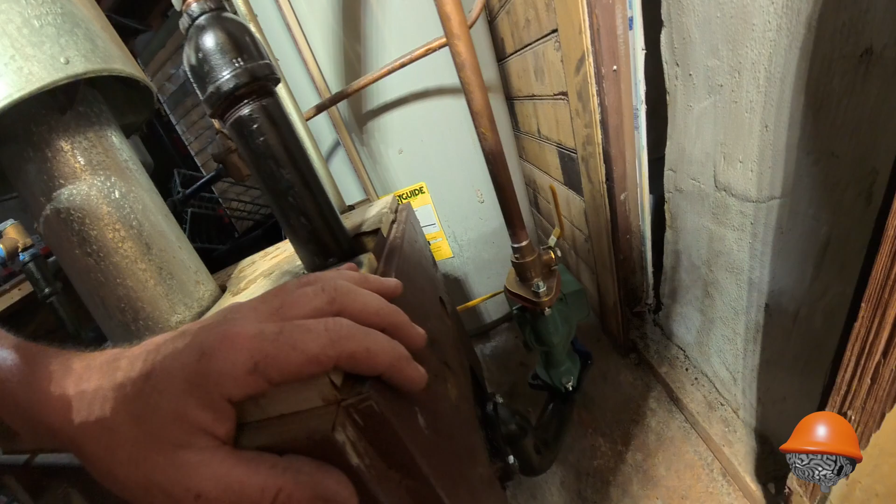Completely new, but there's nothing wrong with the boiler. There's nothing wrong with the boiler. And this is why I think it's good for people to go down, if you're a little handy, just visually inspect. If you got to pull the jacket off the boiler, pull the jacket off the boiler, if you can. Visually inspect. Hey, is there rust? Hey, maybe we can take care of that.

Look at this. That looks brand new. New gaskets, repainted. New valves, new pump. Everything. The jacket looks like hell, but who gives a shit? The jacket does nothing besides cover the boiler from people getting burnt, and it has some insulation in there to kind of hold that heat in. Yeah, it might not be as efficient as some of the newer stuff, but maybe not everyone has $8,000 to burn right now.

So this cost me $400 in materials. Had I charged somebody to do this job, I'd probably charge him $1,000. So $1,000 versus 7 or 8, I would say, yeah, that's pretty good.

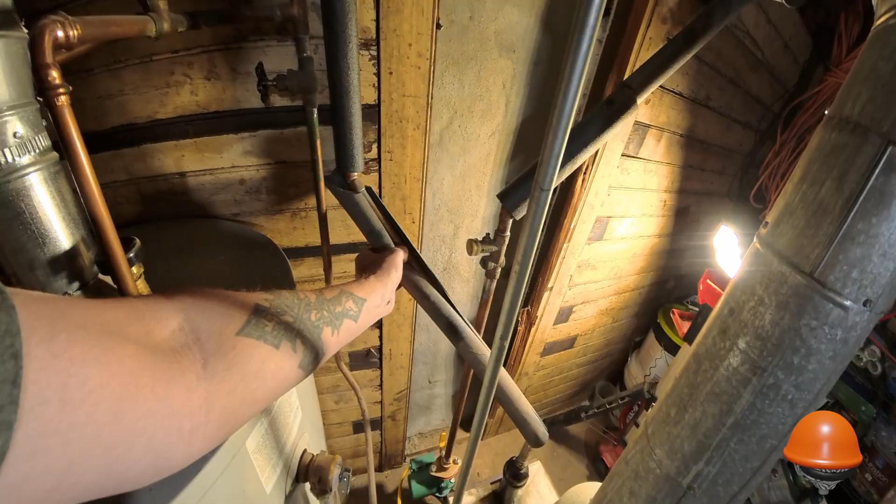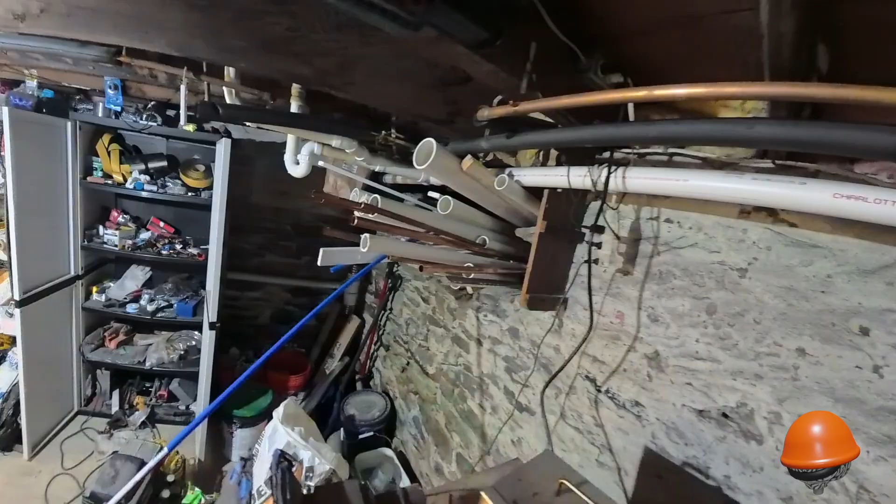And we could do things to up the efficiency, correct? We could go around and get rid of all of this loose pipe insulation that's way too big. Get the proper size pipe insulation and properly go around, which I'm going to do at some point, and insulate all of these heat pipes. Tape them up, wrap them up, make sure that they're all... it's fine to have a little heat thrown off in the basement. I think between that and the 2 water heaters, it keeps it warm enough down here in the wintertime.

So if we can go around and insulate, there's tons of them. Bare. Oh, that's screaming hot. I already went around and replaced all the bleeders. Clipped everything up with nice clips. Everything's hung up nice. So I think my next step is going to be changing a couple of valves and insulating everything to get just a little bit higher efficiency. We want that heat upstairs mostly.

Well, yeah, there it is, guys. I was told, sorry, man, you're going to need a new boiler. I say bullshit. I can almost guarantee this thing will outlive me. Now that we spent a little time, because it looked a little crusty, this thing is as good as new.

We flushed it out. We got all the garbage out of the boiler, fresh water in. It's all bled out. Everything is new. Even have a new control system. So this is almost a modern boiler now. Crazy, right? Be careful who you let into your house.